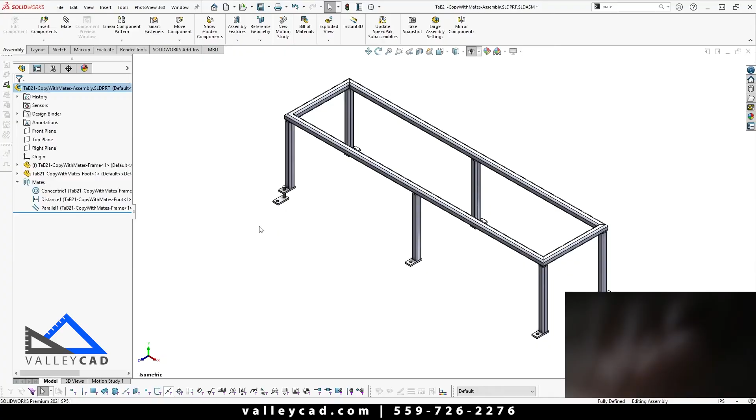So you see that I got a simple little weldment system here, and what we want to do is insert this foot over and over again. Actually, total 6 times is how many times I need this foot. And that foot might look familiar to you.

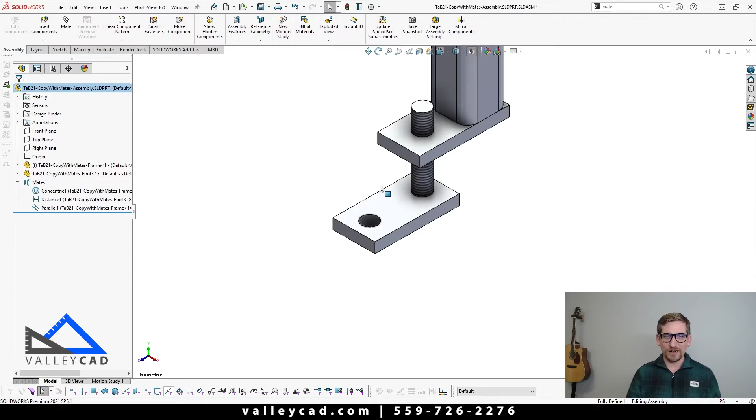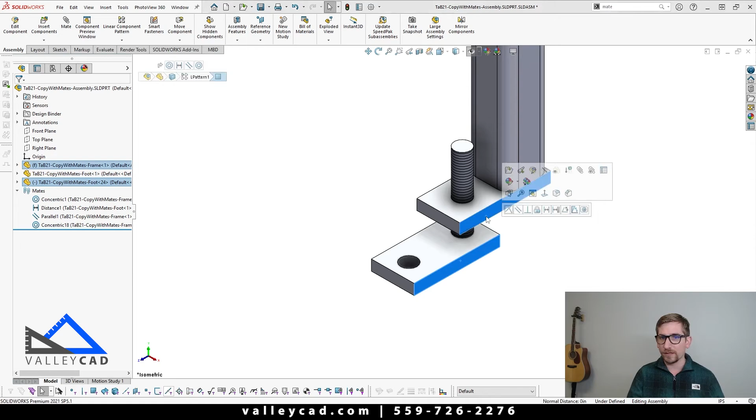So as I was mentioning in the intro, I want to take this foot and I want to duplicate it over and over again, and that's tedious. You know, coming up to insert component, say that part there, component, drop it in. Then I'm going to use control, click on that cylinder there, say be concentric to each other, cool. I'll click on this face, hold down control, click on that face, say be parallel to each other, all right.

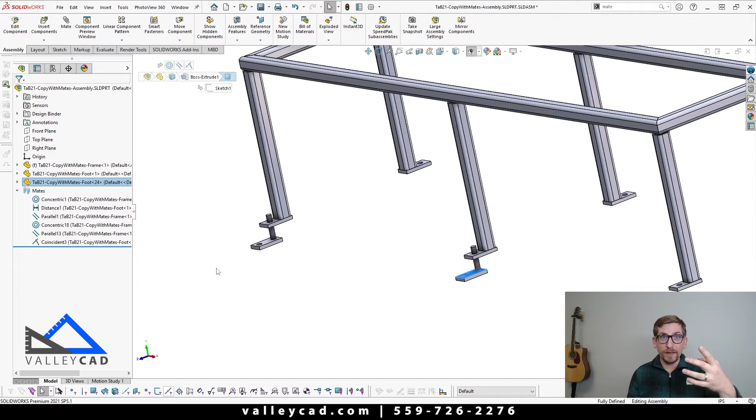And then I need to make sure I'm the same distance. So one way I could do that is simply click on the bottom face, hold down control and click on that bottom face and say be coincident to each other. That's gonna lock this next foot that I inserted in place. But as I was mentioning, I had to insert component, then I had to come in and create 3 new mates to make this thing fully defined on my conveyor system.

Now, yes, there are other ways that we can quickly reuse this very first component, such as using linear patterns or mirroring patterns. There are ways for us to do this in a fast motion as well, but maybe we got a scenario where we don't have a consistent location of where our pads are. Maybe you got a system where you need to duplicate this, but it's not a standard procedure. So this is where the command copy with mates really comes in and is super powerful.

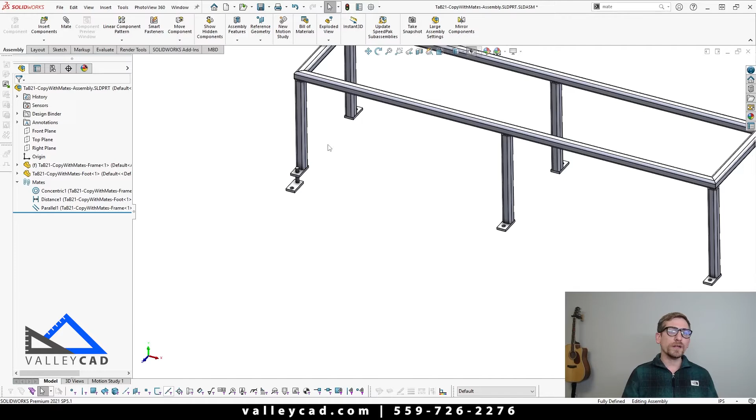So coming in here, I'm going to simply delete this pad. And I'm going to say delete child features with it, so that way it gets rid of those mates inside of it as well. And you can see that living in that little window as well. So simply say delete to that. Okay, so what we want to do is insert a component and mate it all at once. So to do this, we're going to utilize that command I've said multiple times, copy with mates.

So copy with mates lives up here in the top left side of your assembly tab. And if you click on that drop down arrow, you'll see the command called copy with mates. Clicking on this, what SOLIDWORKS is going to ask you to do first is specify the component that you're going to want to basically duplicate with the mates. And that component in this scenario will be that foot.

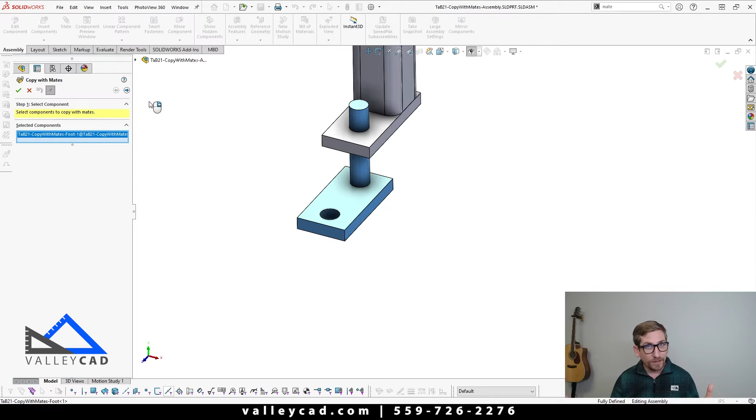So if I click on that, what I'm gonna have to do next is either right click on my mouse, or I could click on this little side arrow. So whenever you see that, it means that you have a secondary process that you have to do to implement this command completely. So simply right clicking, you'll see that SOLIDWORKS will capture that component and all the mates that were used for that component.

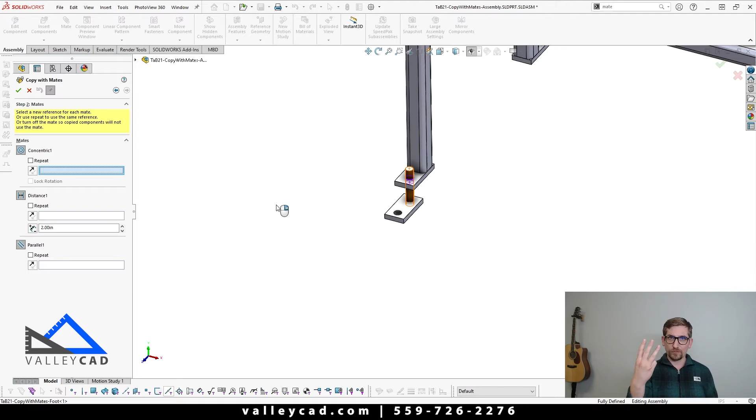Pretty cool. So if I had a really complex part that had multiple mates associated with it, they will all be listed here. In this scenario, we only have 3 mates, so pretty straightforward, right? So what we want to do here is see how these mates were used at first, and how we want them to be used on my duplicated component.

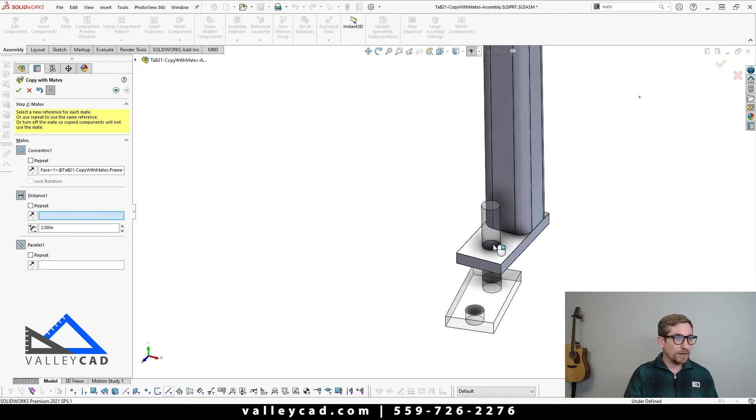So we see that we have a concentric mate here, and that concentric is being used between the shaft of the foot and that hole. Well, how this works is you simply come over to maybe where you want it to live next, and if I click on this cylinder there, SOLIDWORKS will simply drop it in that given location.

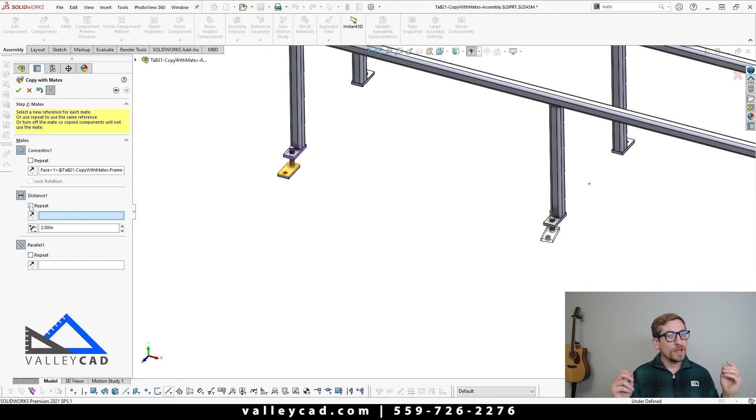Then you'll see the next step there is, hey, let's include a distance mate. Now, with that distance mate, there are 2 options that we could do here. One of them is I could simply say, hey, SOLIDWORKS, just repeat the parameters that I used when I first did that mate command. Hey, pretty cool. But if you don't want it to do that, you want it to reference a different surface or face, you could do that. And also you can reference a new value of distance there too.

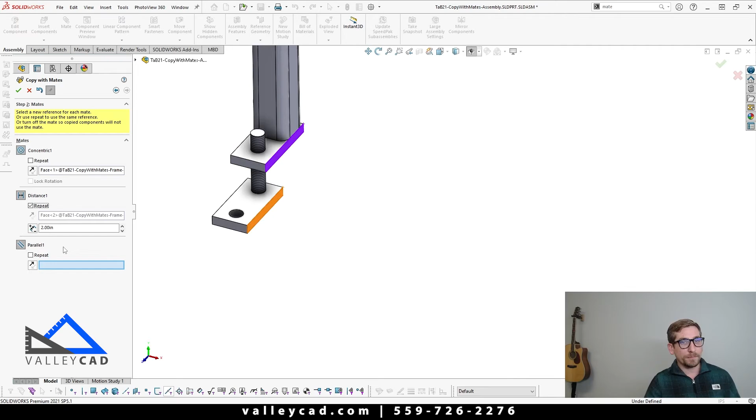Pretty awesome. In this scenario, we're gonna simply say, repeat it. Done. Now, because I click on repeat, it's gonna take all the parameters that were used when I initially inserted that component with that mate. Then the third one that you'll see there is a simple parallel mate. So in this scenario, I'm gonna say repeat again. Now, after that, you'll see that my foot went from a transparent component to an opaque component. So meaning, hey, you got it fully in there.

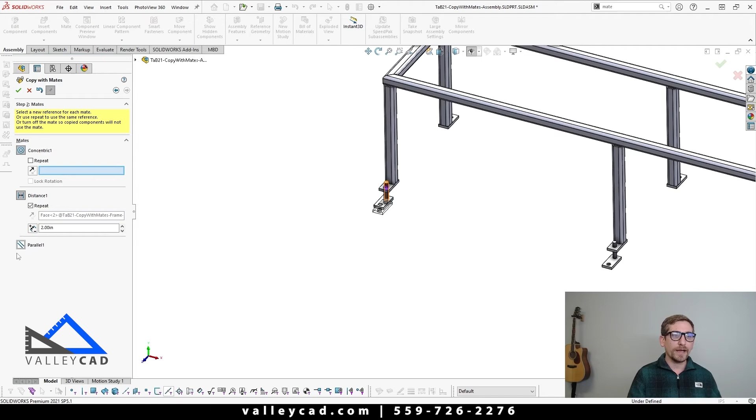So now what I could simply do is right click. Now, because I had these components on repeat there, my distance and parallel, SOLIDWORKS will keep that for this next component I'm gonna drop in. Now, if you do want SOLIDWORKS to ignore a given mate from the parent mate there, you just simply click on that given mate icon. So let's say I want to ignore the parallel mate, simply click on that. SOLIDWORKS will ignore it for this next instance that I'm dropping in.

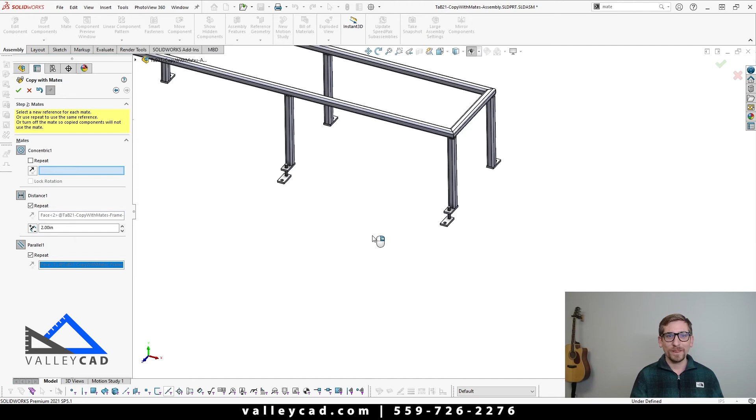Okay, but I do want to keep that parallel and we'll simply utilize the repeat again. So all I have to do is simply click on this cylinder. SOLIDWORKS will take all the parameters that were used initially because I have repeat there and we're done. Simply right click. It was really like that, quick and easy. So now let's come on to our other side here. And as I mentioned, yes, we could easily just say we're done with this and we can mirror those components onto the other side. That's totally fine, but we're gonna still show you how to use the copy with mates.

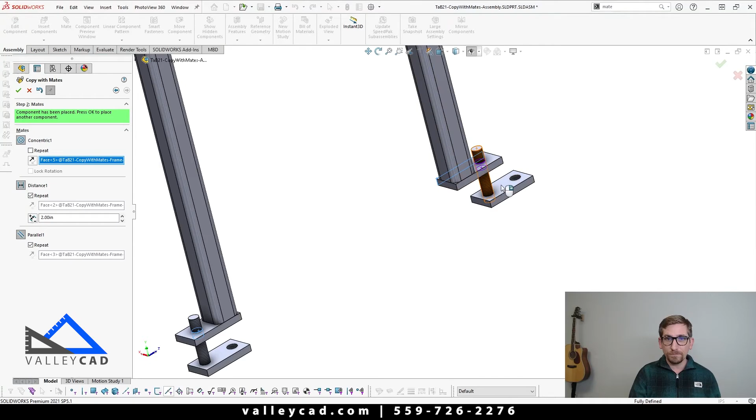So what we're gonna do next is come in and simply click on that cylinder. Now, because SOLIDWORKS is referencing the mates based off of your very first component that you use, it is not based off of the last instance that you dropped in. It's always based off the very first one. You'll see here that SOLIDWORKS is trying to keep that parallel mate associated with how it is initially. So that's why my foot is backwards.

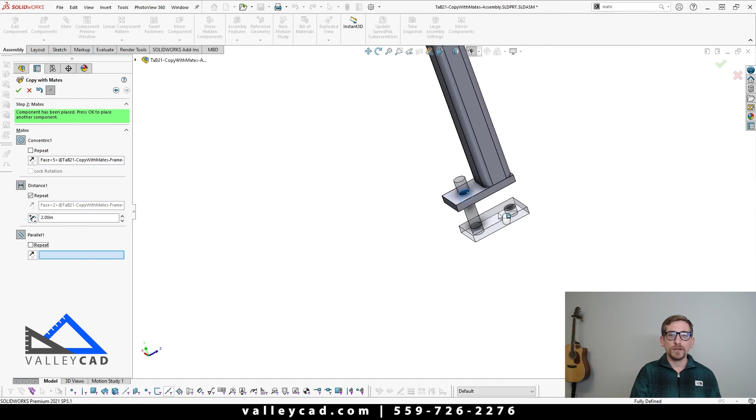So what I will need to do here is simply uncheck that repeat and then reassociate it to another face. So for instance, I could say, hey, I want to be on that face. Okay, done. Then from there, simply right click. And then do that again. We'll simply come in here. I want to be concentric to there. And since I have that parallel unchecked, I can simply click on that face. SOLIDWORKS is good. And like I said, I can also flip that if I want to. So I do want it to stick out that way.

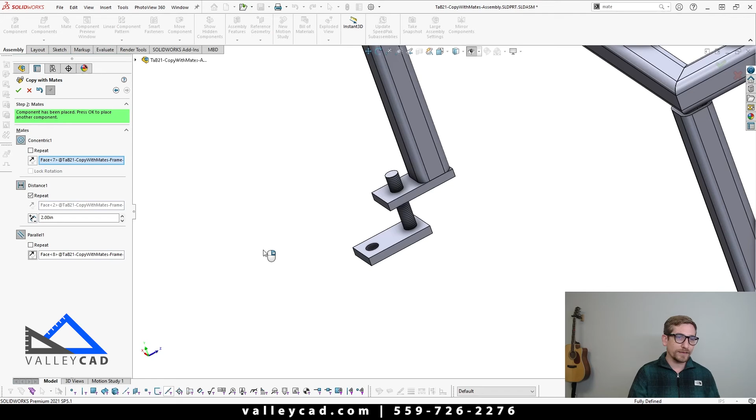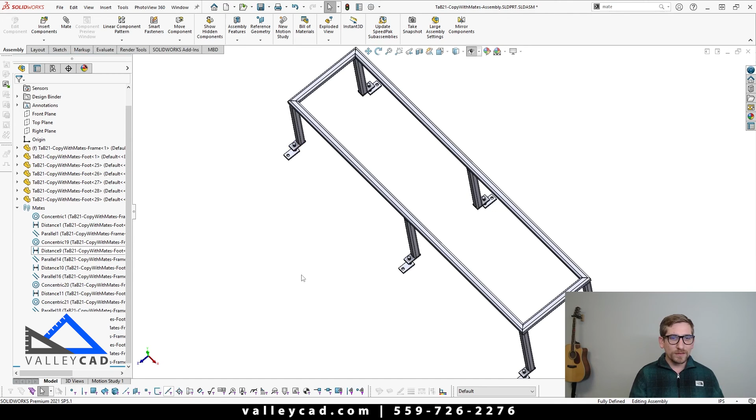Simply right click one more time. And then from here, finish it up. We'll click there, and say done. Now that we insert our last component, you'll see that SOLIDWORKS does show that transparent foot. So I could continue on mating here, or I could just simply click on the cancel button. And then with that, SOLIDWORKS came in and it inserted a total of 5 more feet for me. And you'll see that it has all these mates associated with it, all done inside of one command. So this is one way to speed up inserting components and mating them up quickly. Hopefully you can find some really great applications for this.